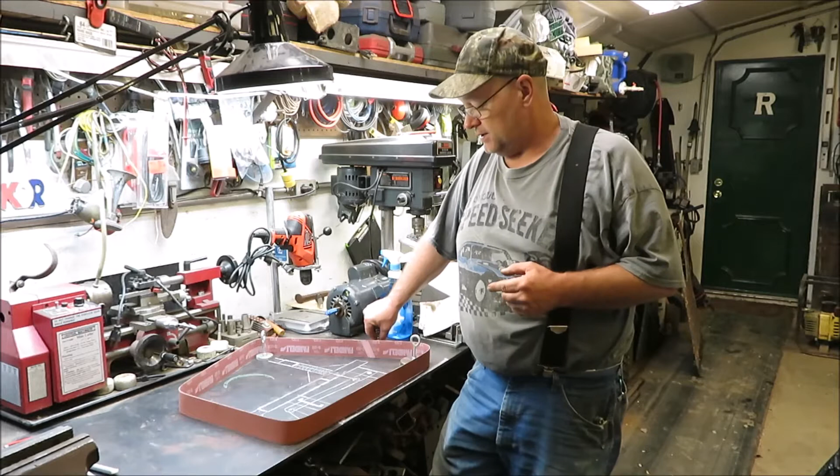Last video I was cleaning up the motor, getting it ready. It's all good to go. Now, like I said, just laying this thing out to try to get an idea of what I want in this grinder. As I told you before, I'll leave the link down there again for you for the belts. If you didn't watch the first video where I showed you all the materials, or didn't get the belt, I'll leave a link down there for you.

Now I have got some magnets, some big round magnets. I got them from various places - some might have come off of speakers, or something else. You probably could buy them right there at Harbor Freight if you want. But I got some magnets to kind of give me an idea of where my wheels are going to be. I set the belt down on there, and then started drawing what I wanted this grinder to look like. So what I'm going to do is get you over here and let you take a look at what I got so far.

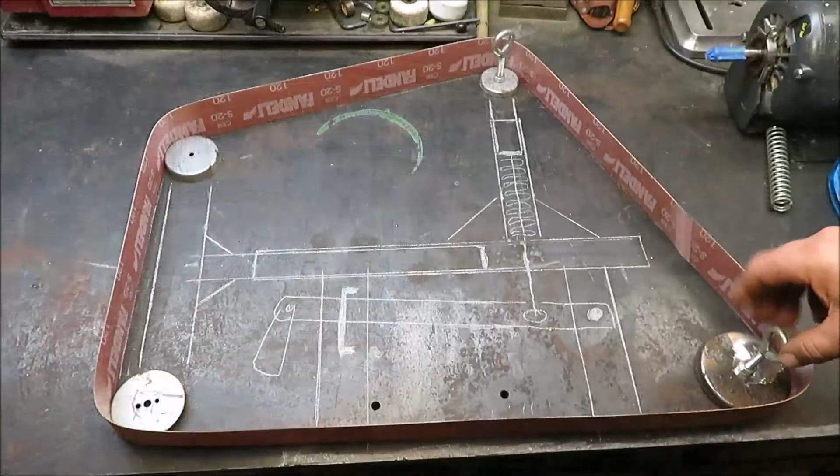Alright, this is sort of the layout that I'm looking for on my grinder. Like I said, I use these magnets - they're nice and round, about the size my wheels are going to be. Now the only one I'm worried about is this back one.

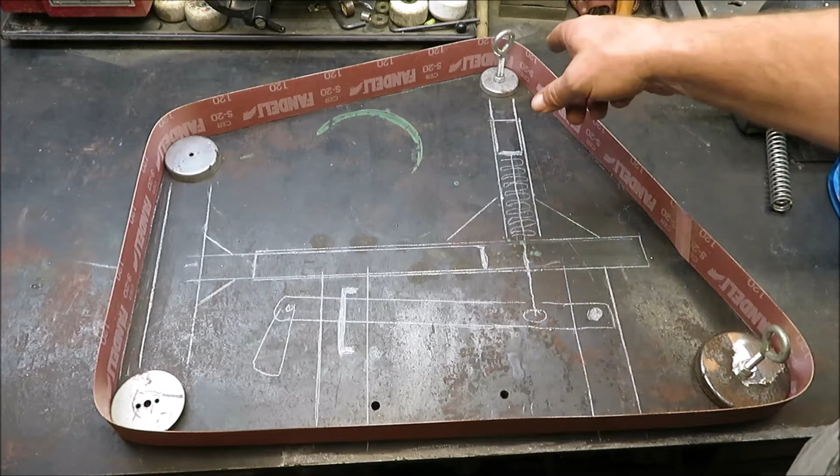My belt is going to come off from the left side. Most people make the belt come off from the right, but I'm going to make mine come off from the left. My motor is turning clockwise, so my motor is going to be on this side facing that way. So my wheel, or my belt, will come off the opposite side.

Now, the way I got this set up, this may not be final - things could change. It's just what I'm thinking of right now.

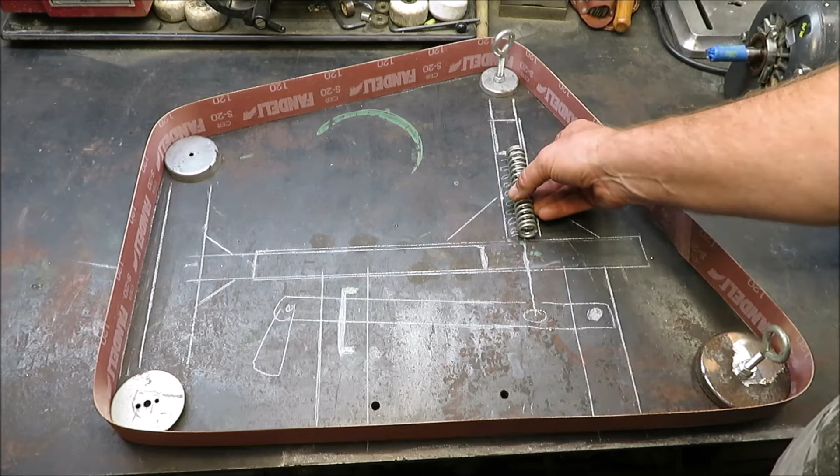Now, on my tensioner pulley here, I'm going to put a spring inside that square tubing right in there. Then I'm going to take a cable and mount it inside the bottom of this. I'm going to put a plate on that square stock, and run that cable all the way down to a lever, which will be able to push up and down to make my tensioner pulley adjustable. So I'll be able to move it up and down with this handle right here.

Now, I don't know if this is going to work. I've never built it, and I haven't seen one yet on YouTube. So this is the way I'm going to set mine up. With the cable inside, I'm going to try to do it as neat as I can so you really don't see a lot of this. And then we'll put a handle out here so you can just push down with your right hand, pull your belt off with your left. You're not going to be reaching up here just to put your belt on and off, not to mess with your tensioner.

Now I got my base plate on the bottom down here - it looks to be about 20 inches, 20 to 21 inches. Now as I start building this and cutting this out and getting it together, I really don't want to give you dimensions yet, because I really don't know if this is going to work.

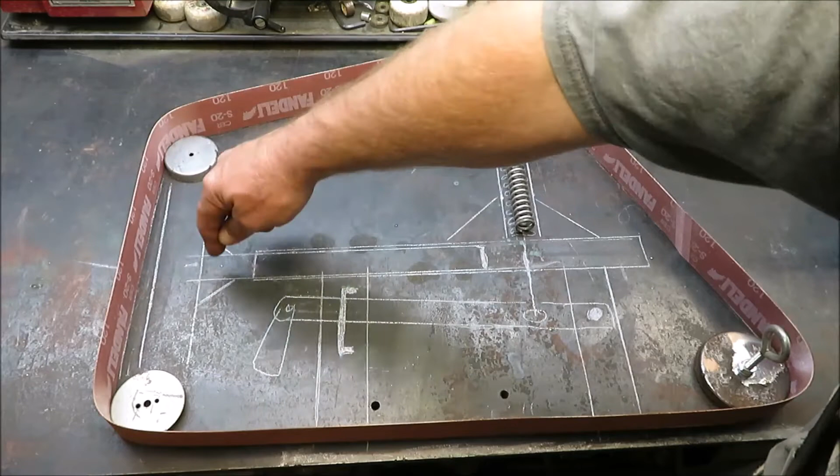I may have to cut some of this so it could slide in more. And then I have to watch that my cable is going down the inside of this tube right here, so I can't let this go back to where it hits my cable. So that piece here, going out to our work table this way, has to slide in and out.

Now this is going to be a bigger square tube, and the tube up here is going to slide down inside of that tube. I'm going to do some 45s here, probably 1/4 inch steel, cut them in 45s.

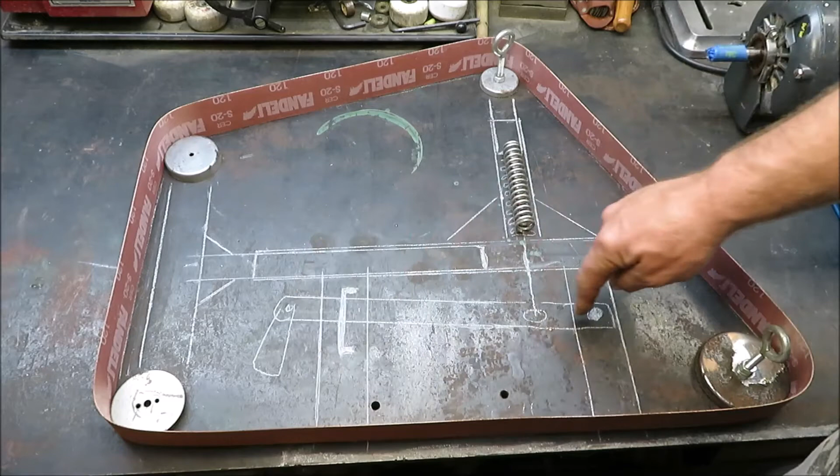Then we'll have a little strap welded on here, and this is just going to be a guide for this handle, to keep the handle running straight up and down, not moving back and out from the machine. And then this is just a bolt, and we'll pin that cable - comes down through there, we'll pin it right in there. So this is kind of the layout that I have.

I need to get my flat stock yet. I haven't, I got a piece. The biggest thing with it, it's 1/4 inch, and cutting it is a little bit difficult.

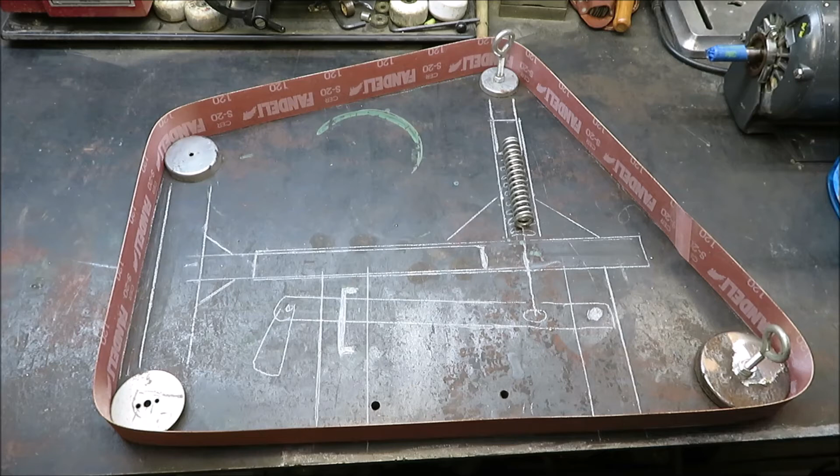So that's going to be our first step, getting that plate mounted on the bottom of this. We'll do our adjuster here, our belt guide up here. I haven't figured that out, but I'm just going to do one step at a time. This is basically my first step.

Now, as you see how I got it set up, I want the spring inside there. So I just squiggly line down through there - that's your spring. This tube is inside of this tube here.

Cable is mounted up in here, goes through all the stock down here to a pin, and then it'll swivel up and down on this, and that will tighten and loosen your cable.

Now, I may have to cut this spring down. I might not want that much spring, and then make this piece up here longer. So that could all change. Everything on this thing can change.

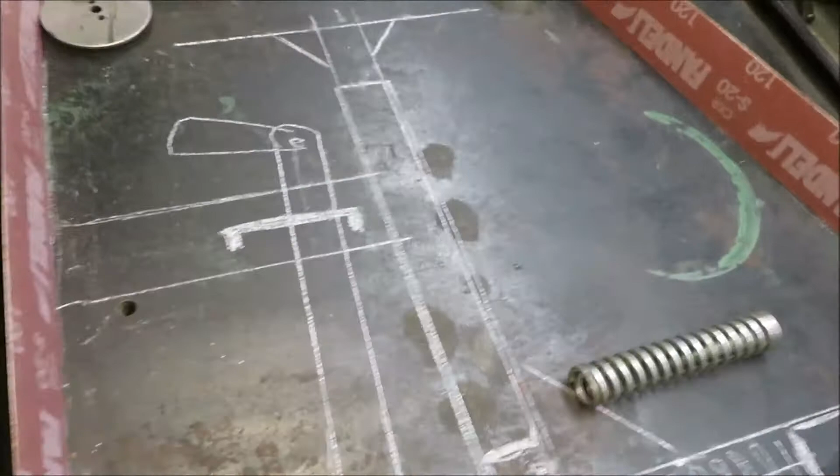Now, my front plate - most people are bolting these on, they bolt this plate on. I haven't seen anybody move this plate. Everybody I seen working on this machine, that plate was straight, it was square and straight. So I'm going to weld mine square and straight.

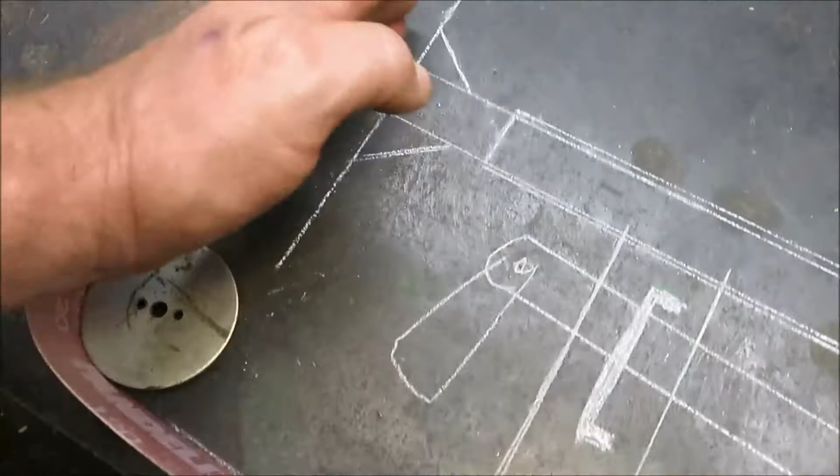If I want something that's turned or angled, I'll do it out on my workbench out here on the front. So I'm going to weld all this straight, it'll be welded straight up. I don't want anything that's actually going to come loose or be bouncing around making a bunch of noise.

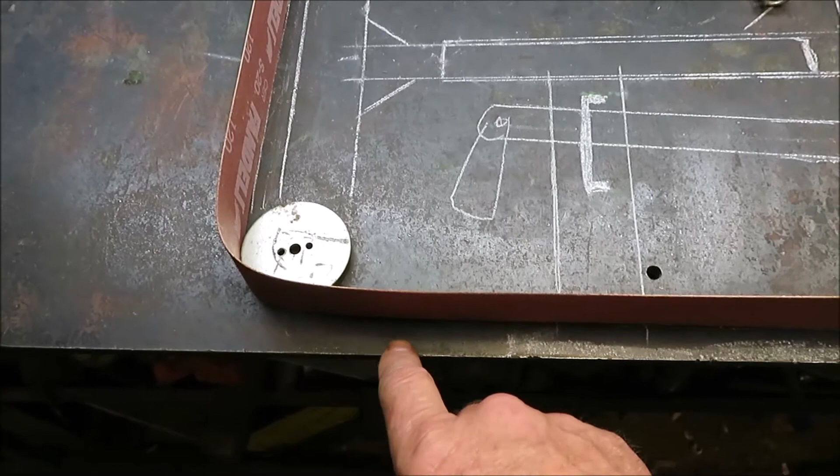So that's what I got so far. And like I said, we're going to get started on the plate on the bottom. I actually got it marked out on the table here, and it's only going to come to about right there, because I want this to be over my bench a little bit. Because I think underneath of there, I'm going to want to hang some type of pan with some water on it, make sure all them sparks are going where we want them to go.

Alright, now what I've done, I went ahead and started cutting some of the bigger stock. This is what everything's going to slide into, and this is going to be the stand itself.

Now, when I come down to this piece right here, I got to thinking, we got to have this motor in here. So the height from here, the center of this motor down, I had to measure the motor - I had to measure like from the shaft down to the table, so I can have that pulley just about in the right place. And then I know that this motor has to go through this hole.

So I had to measure the width of the bracket to get the distance from there out to the bracket, which was about 3.5 to 4 inches.

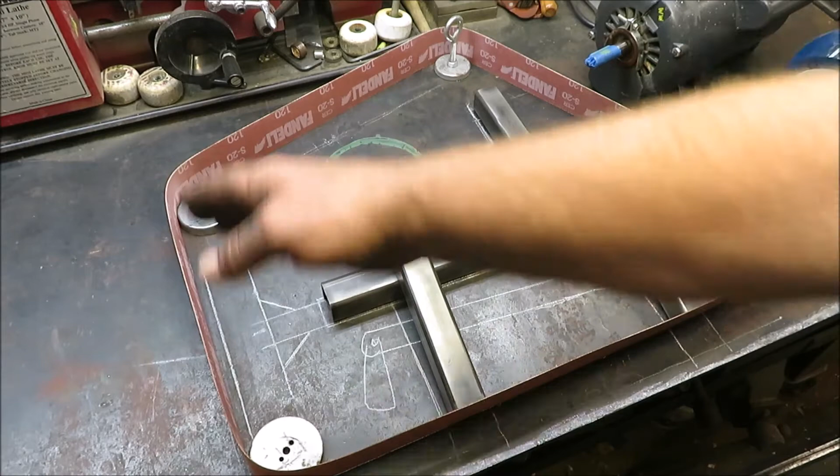Whatever you do when you set this back belt up here, you want to make sure you allow for that pulley to be up and out a little bit if your motor is turning clockwise. That's the way my motor's turning, so I want to make sure the belt's going the right direction. That's why I was going to put all my pulleys on the other side, so I can pull the belt off from that side over there. I had to adjust just a little bit, and you got to expect that as you go.

So I'm going to go ahead and start cutting the pieces that'll go for this guide pulley on the top, and then this piece in the middle here. Alright, now we have this piece cut to fit inside of here.

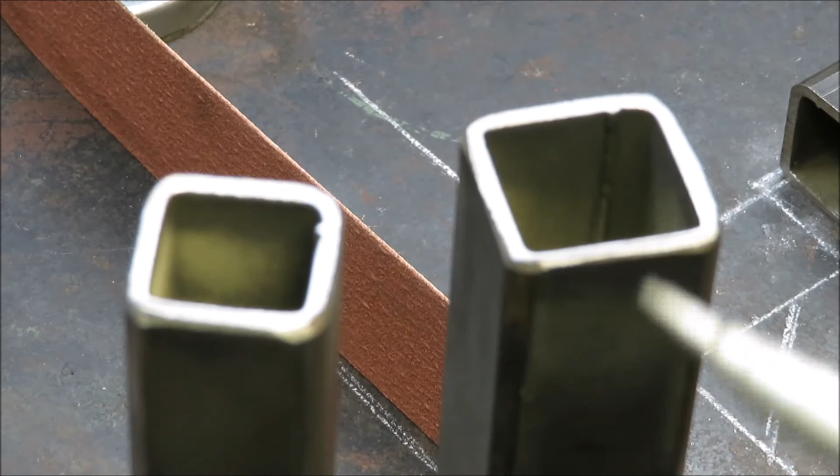Now, when I first started this video, when I was telling you about the steel I bought, I said there was a seam in there. Well, right there is that seam. It goes all the way down through. You can see the seam from my little pointer. It goes straight down. So each piece of this steel has a seam.

See, this one has it right here. So what I'm going to do is take this piece of metal—that seam is right there—and mark it on the outside all the way down. I'm going to take my cutoff wheel and cut that little groove out of this piece of metal, and then this piece should fit inside of there. But we'll have to make a little groove in there so it'll fit. That's going to be my next step.

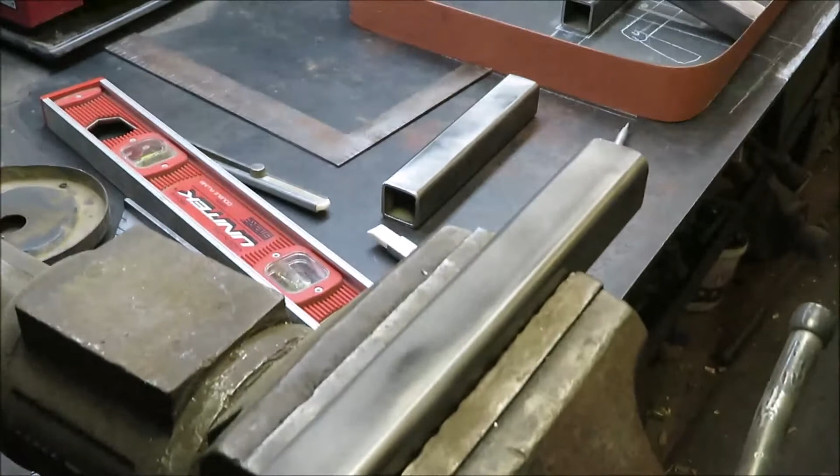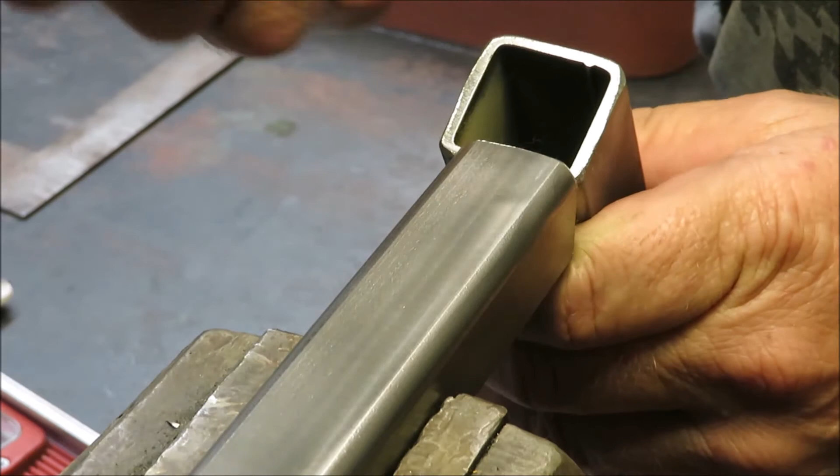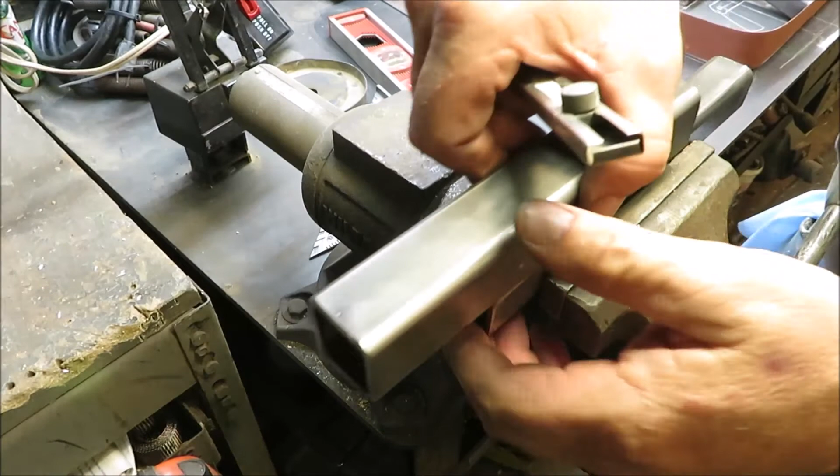Alright, we got this thing chucked up in the vise. Now if we look at our piece of metal, we can actually see the bump right here where it needs to be. So I'm going to hold it up there and get a mark. Then I'm going to take the piece and transfer it right over to the other side, straight across, and we're going to see the little bump on the inside, and mark it on this side.

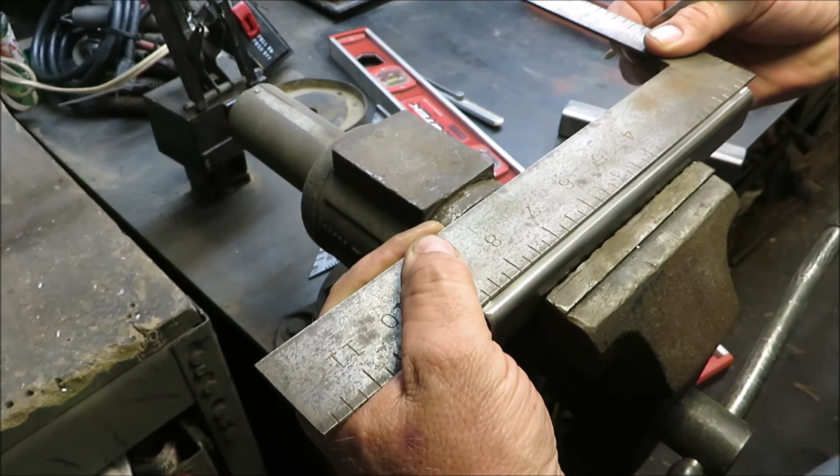Once I got that marked, I'm just going to take a square and lay it right down, a nice straight edge—doesn't have to be a square—and mark this. Try to stay on the line. So now we got a mark going down through there. I'm going to set this up and take a 4-inch grinder with a cutoff wheel, and make a nice little groove right down through there.

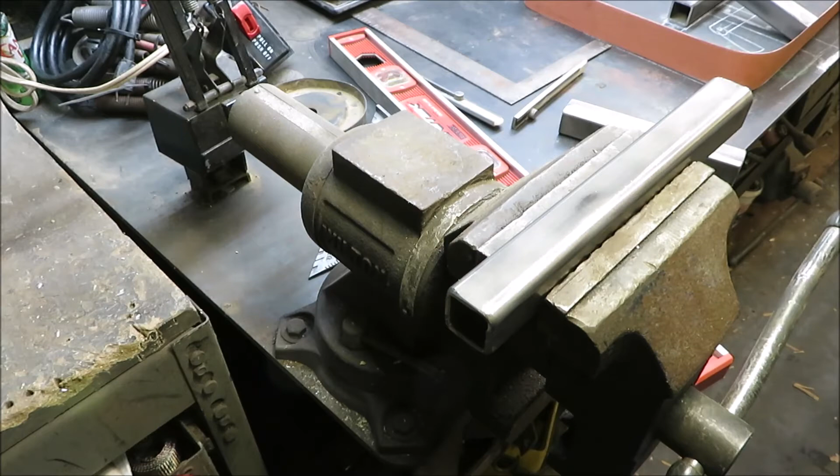And we're going to see if this thing will slide in and out of that pipe.

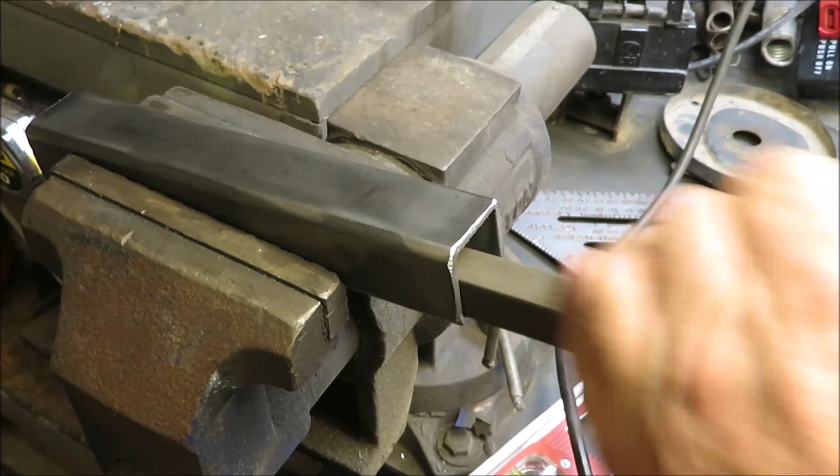I've worked on this piece of metal a good bit. Now I don't want to get it too thin. I got a nice little groove in there, so what I'm going to do now is take a file. Right there is where my seam is. I'm going to take a file on the inside of this and file that seam down a little bit—there might be some high spots in there, so we're going to knock them down a little bit.

I'll go from the other side the same way, and try to get that seam knocked down good.

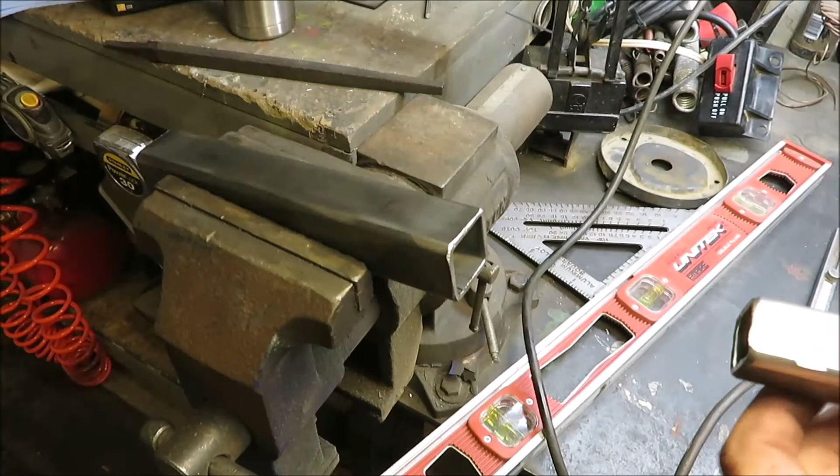Maybe we could just get this thing to fit in there. Like I said, I want it tight, but we want to be able to have... See, now that looks good. Very, very little play in there. And that goes all the way through.

So now, if I was you guys, what I would do when you're doing yours, instead of cutting this groove as deep as I did, you can see it's right on the other seam. But it's going to be okay. Before you go grinding too much on this, file that inside there a little bit. It makes a little more sense, and we're going to have a nice tight fit.

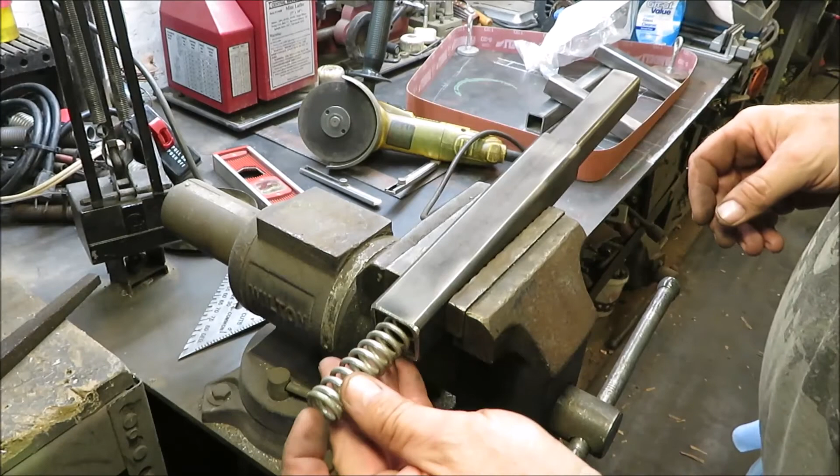So now on this other side here, let's see if I get some light over here. Now this side is the side that I'm going to put my spring in, so you'll have spring pressure on this. And then we'll weld a little square plate on here, and put a cable in there and run it right through the spring, down through the main base, and we'll have our tensioner. There will be very, very little play in this, so we won't have it rattling around.

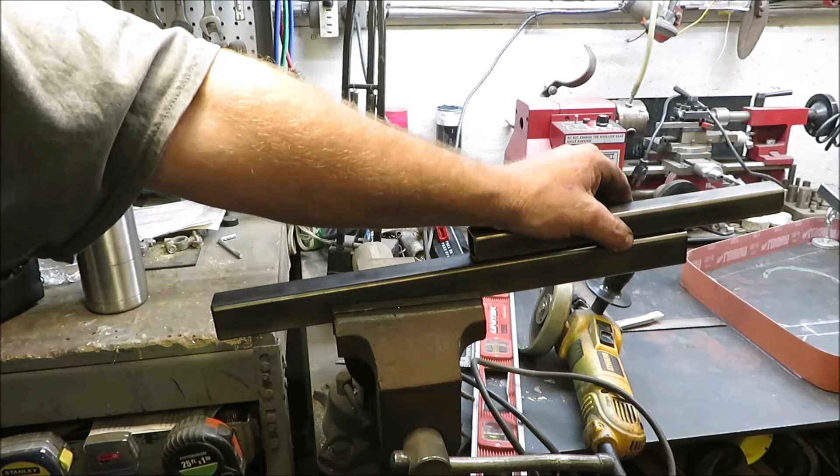Right now I'm working on the very center of the sander, the piece that's going to hold your work piece out there, and the two wheels in the front where you're going to be working. What I'm doing is I'm working with this file, trying to file that seam that's inside there out. It's a little bit of work, but I think I'm getting it. I've just been working on that seam in there.

Now, I'm sure this is taking me a little while, but it's going to be built the way I want it built. I haven't ground anything on the outside of this one yet. I'm just working, like I said, on the inside to see if I can get this thing to slide in and out without grinding anything off.

There's probably some garbage in that thing. Might help it sliding in and out. A little bit tight, about right there somewhere. About the same place. Looks like it's right in there, right in the middle. My file's going to reach it. Just have to take my time and keep working at it.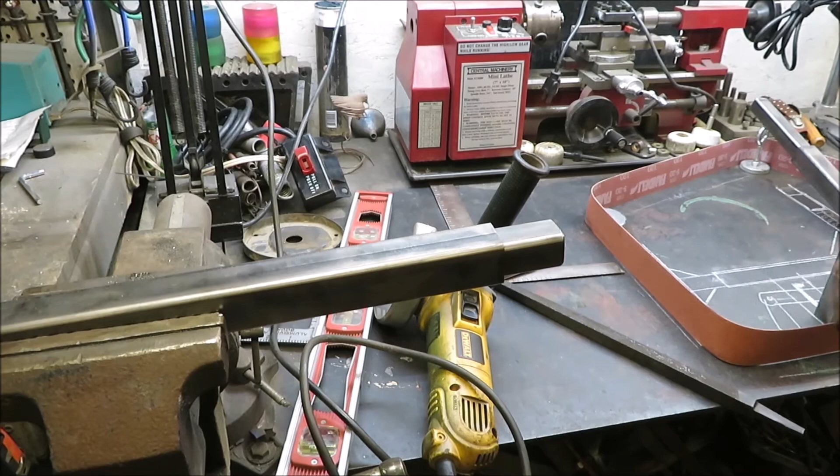And we got the top piece going. Let's get this laid over here. Okay, we got everything laid out here, now what I have cut so far. I'm just basically going by the lines that I had already drawn on here, but I'm still having to adjust a little bit at a time.

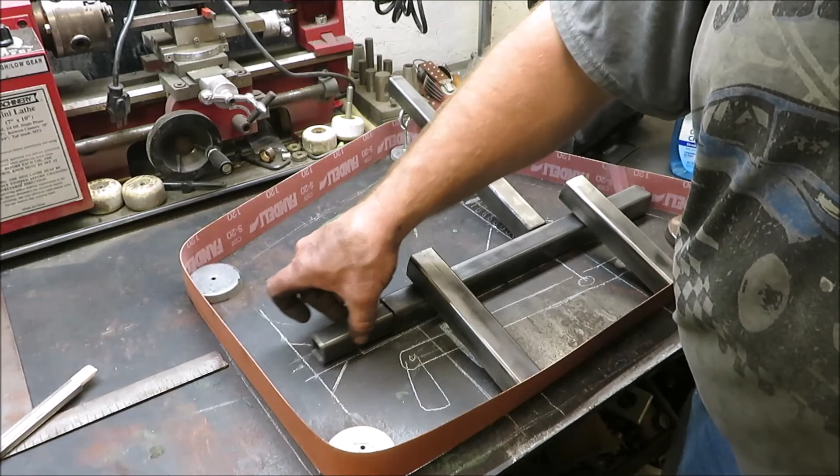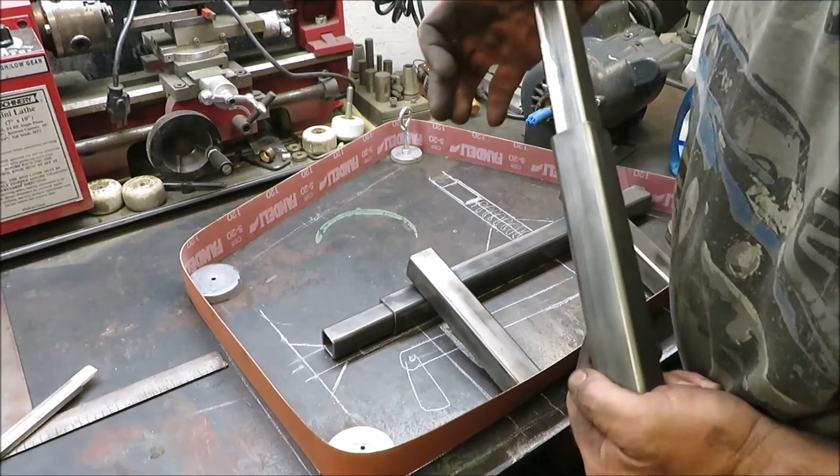This piece here was the one we were just working on, and it slides really good. I love how that thing slides, and I didn't have to grind any metal off of this. All I did was have to file that inside seam. This one here, where I ground that, I'm not crazy about it, but there's not really a lot of pressure on this—that's just going to be our spring for our tensioner. I don't think we're going to have any problem with that.

So that's okay, but from now on we'll be grinding the seams out. I still need my bottom plate. It looks to be about a 12 inch by 20 to 21 inch plate I'm going to need. I don't know whether I'm just going to go have that cut. I have steel, but I really don't have a good way to cut it, and I don't feel like cutting it with a 4-inch grinder right now. So I guess it's actually a pretty good sized piece. If I have to, I will.

But I'm going to go check. I got some friends that I might be able to get some steel off. I might go back to that Huntington Steel there and see what they do about cutting me up a piece.

So that's the end of this part. I do believe this is part 3. Stay tuned for part 4. We're going to be putting this thing together. I'll have that bottom plate and we're going to get some welding done.